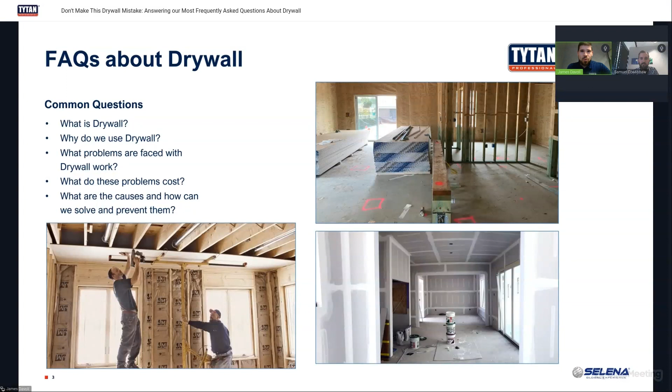So, first, we'll get into some frequently asked questions about drywall. And some of the common questions that we get, and you may see as well: what is drywall? Why do we use drywall? What problems are faced with drywall work? What do these problems cost? And last but not least, what are the causes of these problems and how can we solve and prevent them? So this next part of what is drywall and why do we use it, I will pass over to Samuel.

And here we are, good sir. Sure. Yeah. Thanks for having me on the webinar today, James.

So this is kind of the starting question. Obviously, drywall is super common. I don't know about the people watching this or yourself, James, but I'm near drywall basically all the time, whether I'm at home or at work or we're on a job site or wherever. It's so common in all construction, residential, commercial, or whatever. And it's in every house, it's in every building. And so I published this article recently that I just titled "What is Drywall and Why Do We Use It?" And I know for myself, when I'm publishing something like this, a lot of times I'm wondering this question as well. And so this is just some of what I learned.

So drywall is basically just this crushed up mineral called calcium sulfate dihydrate, and they use it to make all sorts of different forms of drywall, whether it's moisture resistant, fire resistant, soundproof. There's all sorts of types that they use in construction. It's also called gypsum, but basically, due to its fire resistant properties and some of its durability, I would say, is why it's so common. It's a relatively affordable material as well.

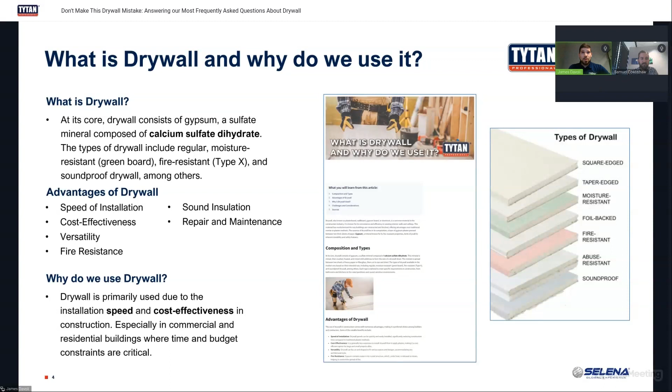But we will go ahead and thank you, Samuel, for going through your article and walking us through what is drywall and why we use it. We're going to get next into our topic of some of the problems that you can have with drywall and what these problems could cost you. So, the first question that we're going to discuss: what problems are faced with drywall work?

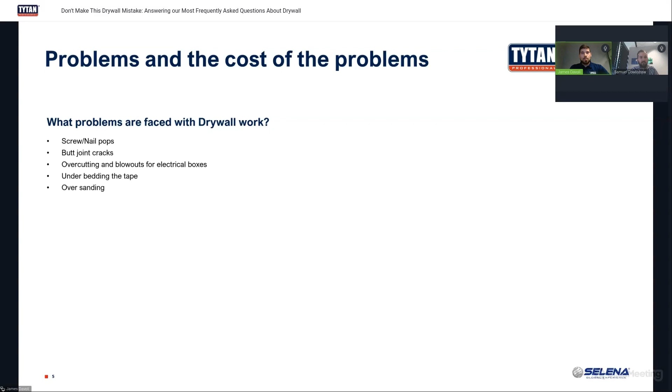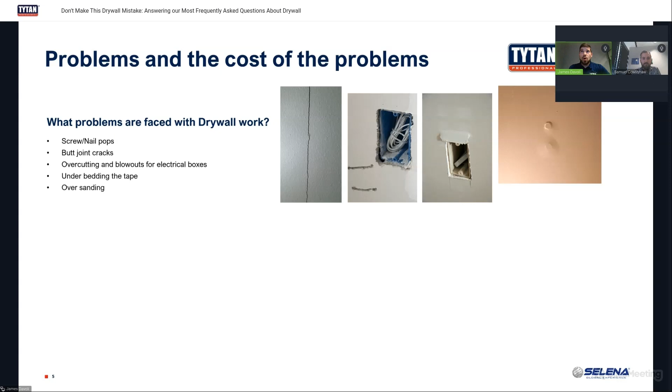Some of the most common problems faced with drywall work would include screw or nail pops, as you see here on the right. The next would be butt joint cracks, and then you'll have overcutting or undercutting for electrical boxes that could lead to a blowout. You can have underbedding of the tape, so then the tape starts to show after many different seasons of heating and cooling. That's what my garage looks like. Yeah, same in my garage. Not enough putty on top, and if you sand it too much, is another way that you could have the tape showing. And so those are some very common problems to have when working with drywall.

And the hard part is that although these problems might look minor to the eye, aesthetic problems to a homeowner are very huge as far as how they view their home for reliability, quality, and really just their essence of safety and comfort. That's what a homeowner is looking for: safety, comfort, quality. And when they see things like screw pops or butt joint cracks or over-sanded drywall, it's not aesthetically pleasing, and it gives them a little concern about the quality of the workmanship for that drywall that had been hung, and maybe even the quality of their house.

So, what do these problems cost? Let's take a step back, because at first you have the original cost of the job. You go in, it's a residential new build, your drywall crew is putting all the drywall up. They've taped, they've puttied, they've sanded, and they've passed inspection, ready to go for the next crew. So that's time, that's material, and you're going to use quite a lot of both for that new build. And so the original job cost is part of something that could cause a problem for your company, which we'll get into.

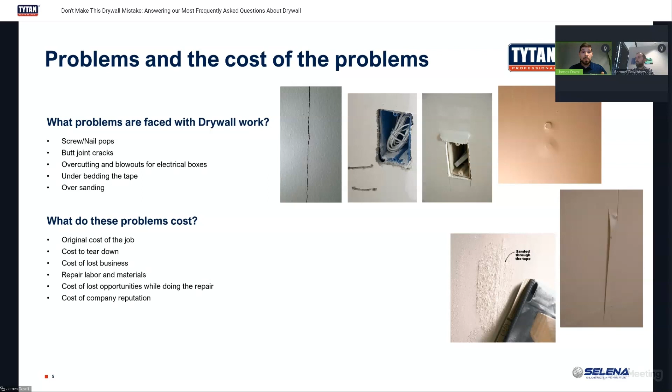And so really, what does this problem cost you? It could cost you quite a bit. Really, in essence, it could cost you your company's reputation for quality. And homeowners and home builders, they're looking for quality work to be done. That's what a home builder is really wanting at the end of the day. They want quality work. A homeowner wants a quality house. So really, all of these problems, they cost you your company's reputation. And if your company loses its reputation, this could cost you your business.

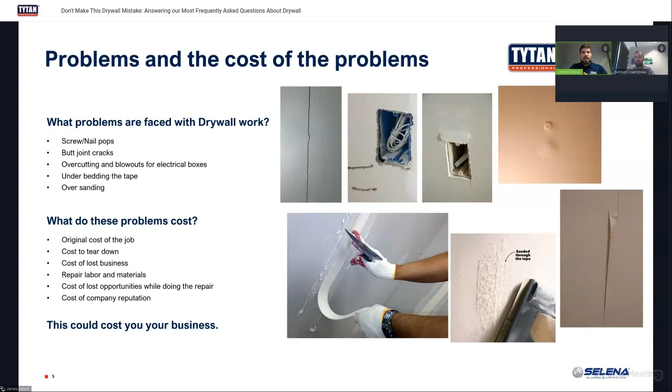So these problems, they might seem small, because they're really aesthetic. They're not necessarily always structural. They may be just the aesthetic, but these aesthetic problems, they could cost you your business if they're not taken care of properly, if they're not prevented, and if there's not solutions to these problems. That's what could happen. So let's talk about what might cause some of these problems and maybe some solutions and preventions to these problems so that way they don't happen in the future.

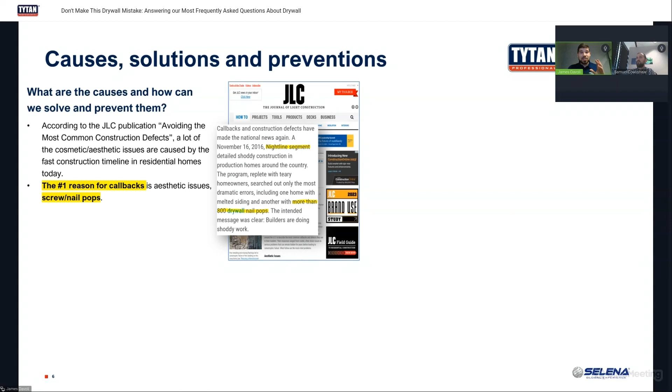So, what are the causes and how can we solve or prevent them? So, what are the causes of these problems? I'm going to take a look at this publication from JLC, which is the Journal of Light Construction. In here, they talk about avoiding the most common construction defects. And in there, their number one is cosmetic. And that cosmetic number one for callbacks is screw or nail pops.

Screw and nail pops are the number one problem that as a drywaller you're going to face because it's the number one callback you will have to go and repair. So this is the number one lost reason of business for the drywall company to get new business. It's also the number one reason homeowners or home builders will have a callback. And it's the number one thing that homeowners associate with a quality house and the aesthetic side of their home.

So this is a huge, huge opportunity as a home builder and as a drywaller to really hone in and fix, solve, and prevent. So that way you can knock out this number one reason for a homeowner to call back and get replaced the aesthetic part of the screw or nail pop.

So in this article, they talked about there was a Nightline segment in 2016 where one lady went through her new build and found over 800 drywall screw pops. Okay, over 800. There's approximately 4,000 screws in a 2,000 square foot house. So you're talking like 20% of this lady's house had screw or nail pops in it. That is a lot. 800 drywall screw pops. Okay. That's a lot. That's a huge callback. That's a huge cost to that home builder and to that reputation of the home builder and the drywaller.

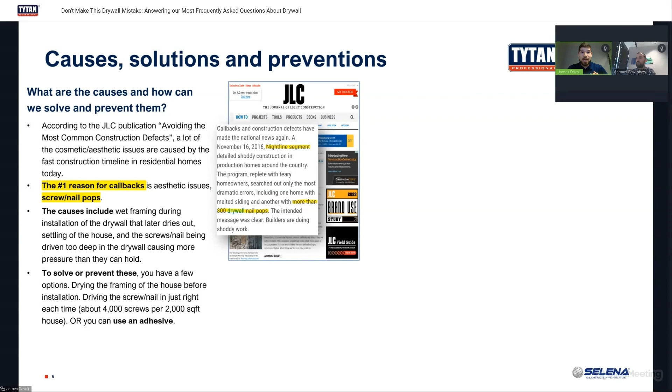So one of the last things that you could do is you could use a drywall adhesive. And drywall adhesives are made to help prevent screw and nail pops. That's what they're made for. But not all drywall adhesives are okay to use. So this kind of leads me into my next part of the solution and prevention.

We know what the cause is. The cause could be the wet framing, could be the settling, could be driving in the screw or nail too deep and it's embedded in that drywall. So one of the preventions would be using a drywall adhesive, but is any drywall adhesive okay to use? First, I want to point back to one of our previous webinars where we went through 6 building codes you didn't know.

And in there, I talk about what this drywall adhesive needs to meet in order to be considered a drywall adhesive and in order to meet regulations for this new build. So in order to use a drywall adhesive, you can't just use any adhesive. You can't go get Elmer's wood glue and use it as a drywall adhesive. You have to get a specific product that's been tested to code. So go back and check out our 6 building codes you didn't know, and you'll see the code that I'm referencing here.

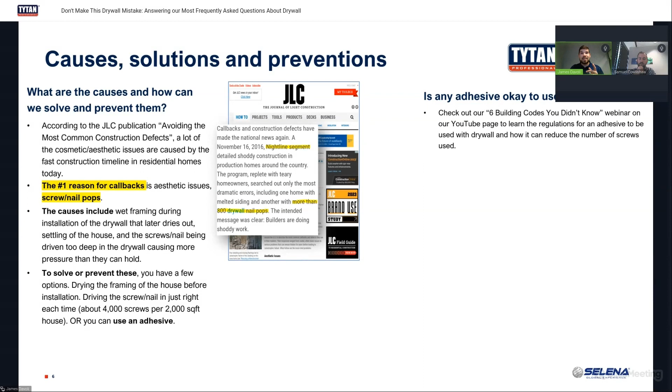So in these drywall adhesives, there's different categories or almost different products in a sense of what can be used. You have caulk adhesive, you have polyurethane adhesive. And so which one's okay to use? You know, which one would you prefer to use and which one is best to prevent and solve the problem of screw pops or nail pops?

Well, according to USG, one of the largest gypsum board drywall sheet manufacturers in the United States, according to their research for fastener related drywall installation issues and their recommendations, they did testing with caulk adhesive: low VOC caulk adhesive, water based caulk adhesive, and solvent based caulk adhesive, and they found that all of these different forms of caulk adhesive will still allow screw pops to happen because the caulk adhesive will shrink during the curing process.

And what do they mean by it shrinks during the curing process? That water or that solvent in that caulk adhesive evaporates. So it leaves the caulk adhesive, it shrinks, and it actually will separate from either the stud or from the backing of the drywall. So now your adhesive, because it's shrunk, is no longer adhering to the back of the gypsum board, the back of that drywall, and to the stud.

It's either adhering only to the stud or only to the back of that gypsum board. So really that adhesive is not doing much of anything. It can't prevent or solve any problem if it's not even doing its simple job of adhering the stud and the gypsum board.

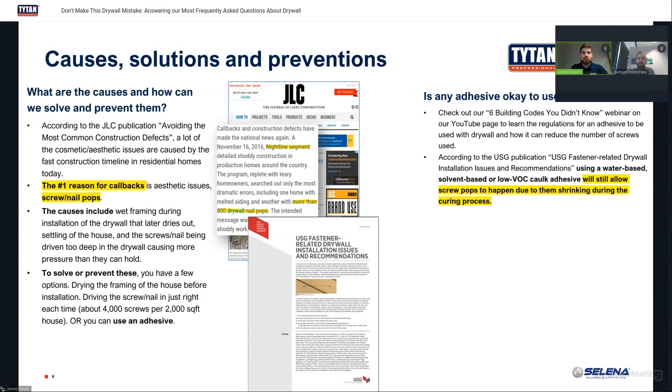So based off of their research, if you can't use caulk adhesive because it's going to shrink, really that only leaves you with one solution, one prevention to the number one reason for callbacks, which are screw and nail pops. There's only one solution, only one prevention, and that's to use a polyurethane adhesive. With this polyurethane adhesive, make sure that it has been tested to ASTM D6464 and ASTM C557, those regulations needed for a drywall adhesive to be used.

Polyurethane drywall adhesives expand during their curing. So they don't shrink. Instead, they expand and they grab that drywall or gypsum board and permanently bond that backing to the stud. When you're bonding the stud to the gypsum board and vice versa, if there's any house settling and the framing of the house moves, well, guess what? Your gypsum board now is moving with it.

If there's any warping or condensation on the wood that causes it to expand or contract, guess what? Your gypsum board's not going anywhere because it's been bonded from the top of that drywall and the top of that stud to the bottom. It's been bonded. It's not moving.

In case you've driven a screw or nail in too deep in that gypsum board and put too much strain on that fastener, a polyurethane adhesive, because it expands, will help adhere and bond the backing of that gypsum board to the stud, which relieves pressure. It relieves undue stress on that fastener, so now you're preventing screw pops and nail pops because you've permanently bonded the backing of the drywall to the stud.

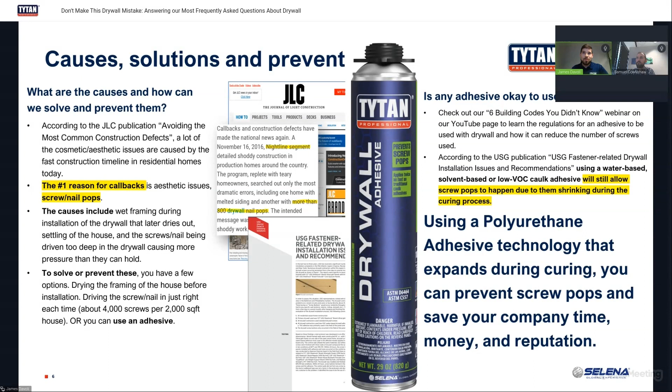So last, let's go through a summary and some questions that there might be. So, what is drywall and why do we use it? Samuel did a great explanation of this. Drywall is calcium sulfate dihydrate, and we use it because of the speed of application and its cost effectiveness.

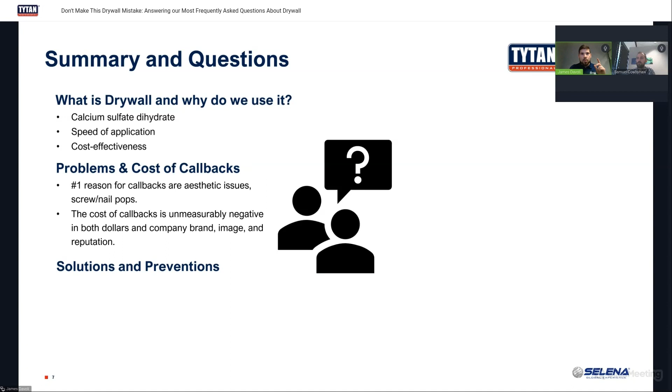What are some problems and what is the cost of these problems, the cost of a callback? Well, the number one reason for a callback is screw and nail pops. And this callback could cost you the reputation of your business, your brand image as a home builder or drywall installer, which could quite literally cost you your business.

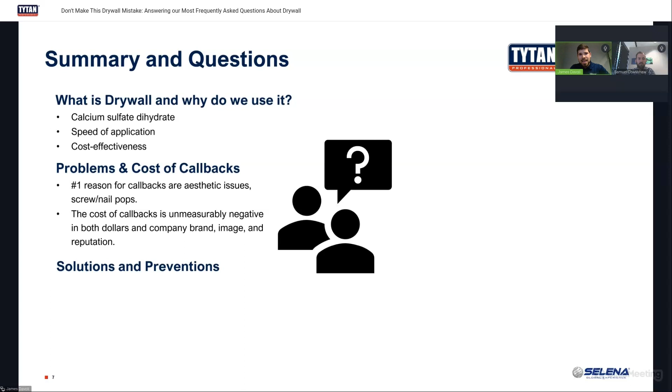So last, what were some of the solutions and preventions? Well, there's really only one solution and prevention in my mind, and that's to use a polyurethane adhesive like the Tytan Professional drywall adhesive that will expand during the curing process to prevent screw and nail pops from ever happening.